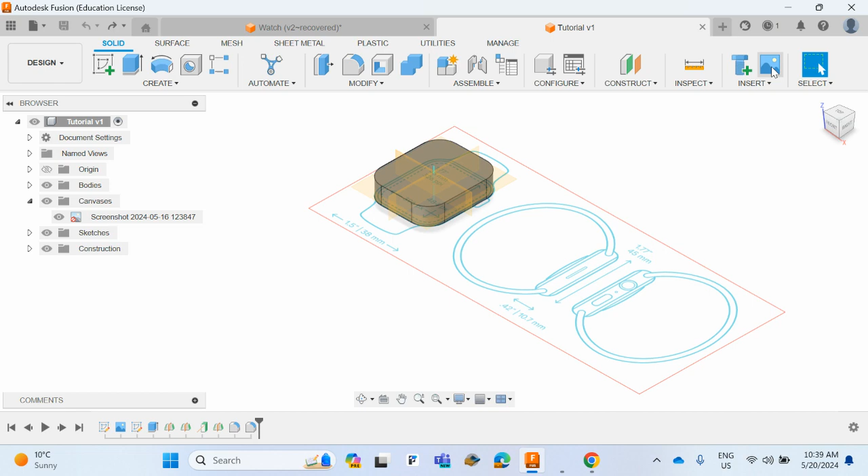So the next thing we're going to do is get another canvas image so we can get the watch now in 3D. We'll come up to Insert again, Canvas, set it from my computer, scroll over on my screenshots, and we're going to stick it on this face.

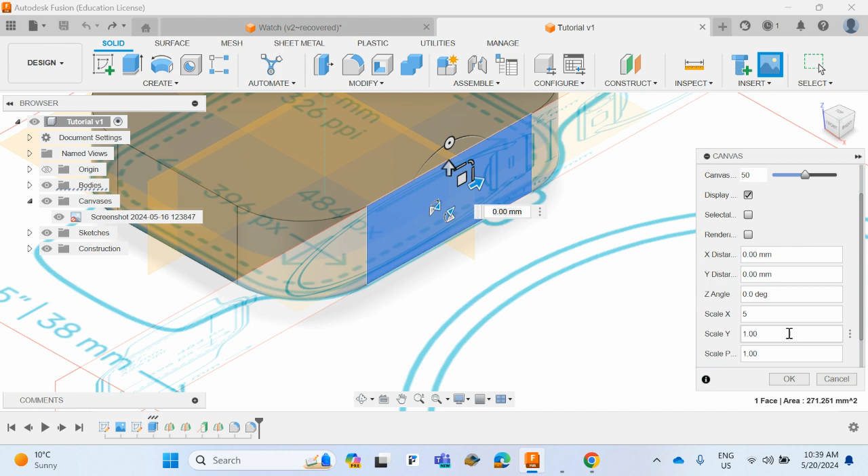Now, one thing you'll notice is that's really tiny. So you can just pick a scale of how much you want to go. We're just going to scale 5 times in the X, and then 5 times in the Y, just to get it roughly right—it doesn't actually matter exactly how it goes.

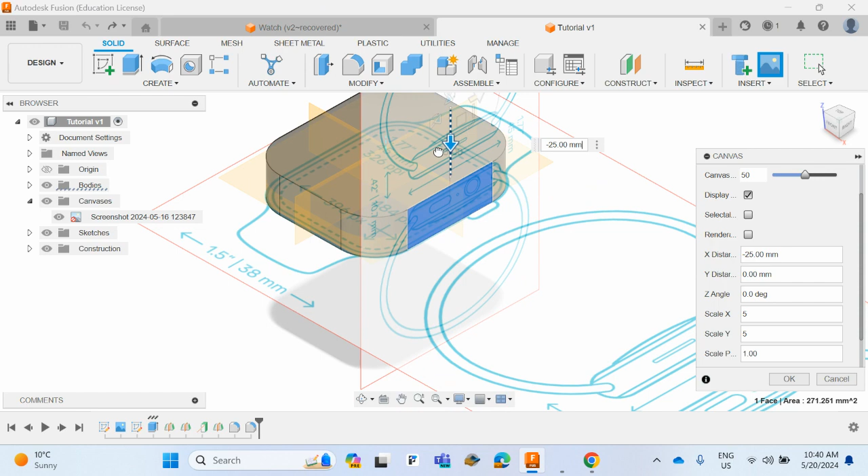We can also see here it's rotated the wrong way. I want it to be rotated 90 degrees clockwise, so I can just rotate that around. Whoop, 90 degrees. And I could also move it roughly into position—you can see I'm roughly about here. And then that'll be okay.

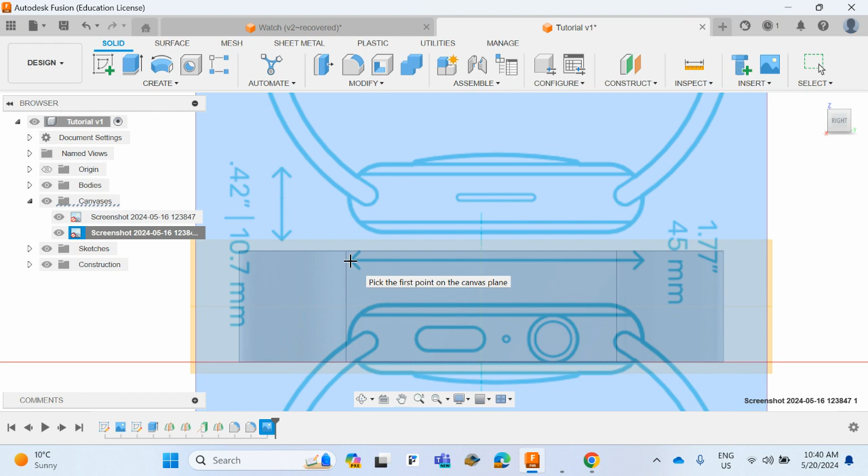So we can now see if I turn that around, that's actually a little bit small. So I can come back here, right click on this image and hit calibrate. The place you want to calibrate is the longest dimension you can find. Fortunately, this drawing has got a nice dimension line on it. So I click on that point, click on that point, and we'll say 45 millimeters. And just hit enter.

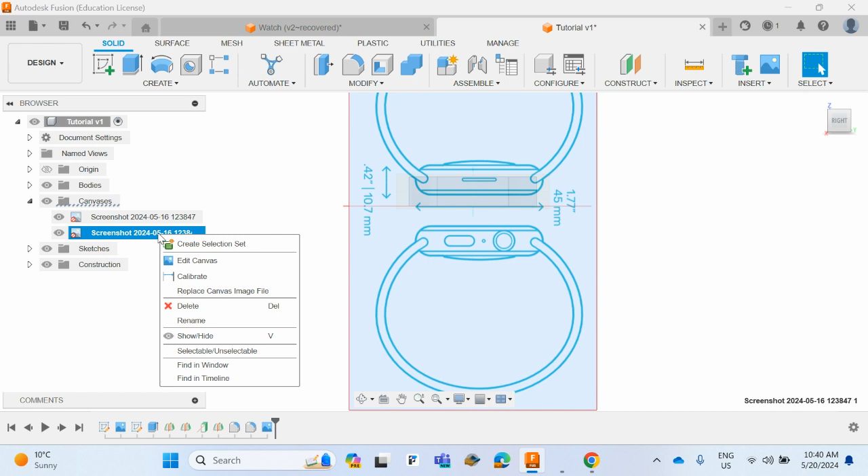And now it's the right size, but it's not quite the right position because I want the side of this watch here to be up here. So now I can right click on this, hit edit canvas, and I can just roughly drag it into position.

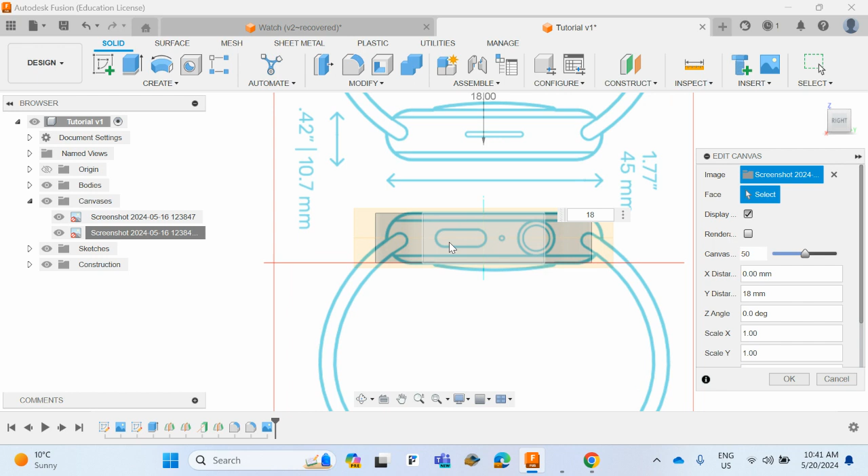You can see that it jumps in big steps, so it's gone from 10 to 20 millimeters there. So I can get it to—20 is going to be too far, 10 is not enough. So I'm going to go to this position here, 18. And that just gets—I didn't do that deliberately, but that's flipped perfectly.

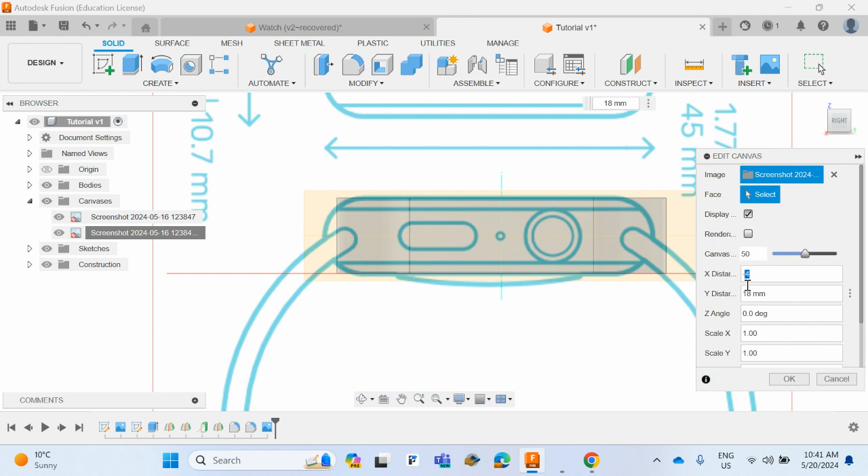But I also want to move slightly on the X. So first up, I'll try 5. Actually 5 didn't work, it's gone the wrong direction, so I'll change that to -5. And try -4. -3. -2. And that's slightly too far, so we'll just go -2.5. And that's probably pretty close.

So now when we look in 3D, you can see I've got the front of the watch and the side of the watch now lined up with where I want them to go.

Something that's probably a good idea to do at this point, which we haven't done already, is save your work. So that's just a matter of going File and Save. Once you've given your file a name, it'll be automatically backed up, and you'll get all of the different versions of your watch as you go.

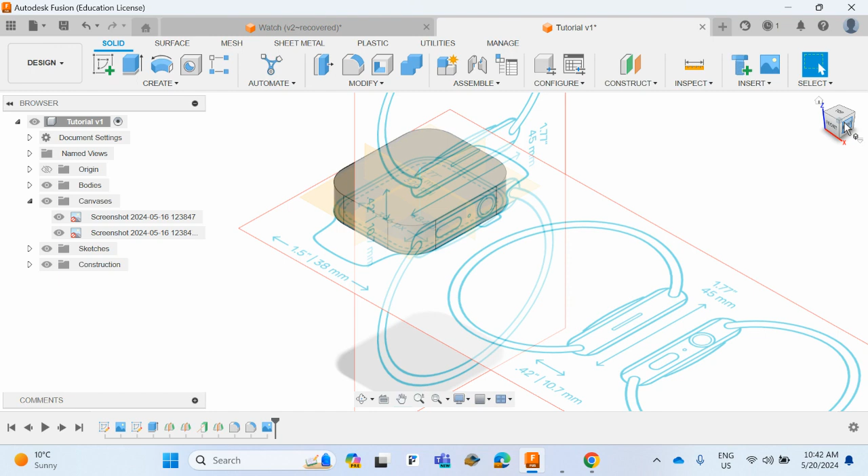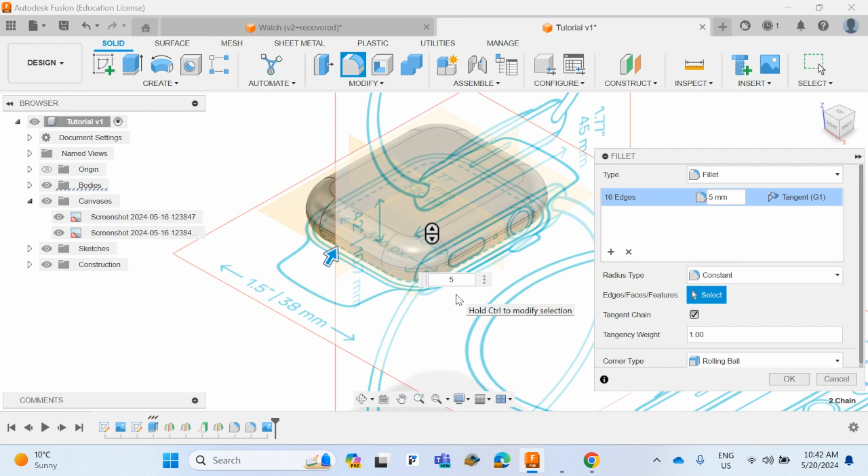One last step we'll do in this video is the filleting that's going to go on these sides here. We'll fillet probably about 5 millimeters on this side. So we'll click fillet, click on that front edge and the back edge, and we'll change that to 5 millimeters. And that gets us—if we look at the right side—that pretty well lines up perfectly. And that's what we're doing in this video.